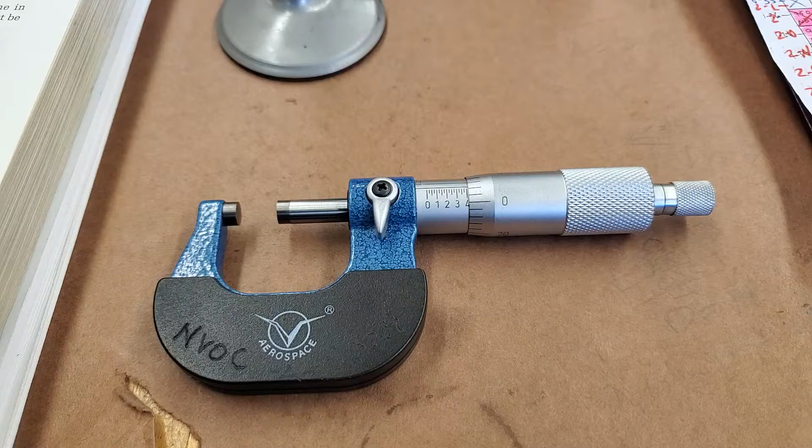Hey guys, thank you for watching, and today I'm going to show you how to use a micrometer.

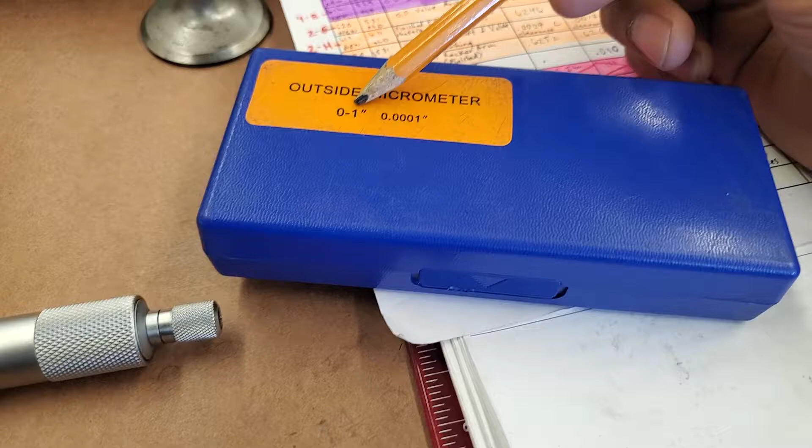And it came in this box, which is an outside micrometer. It measures from 0 to 1 inch, and it's in 0.0001, ten-thousandths. And right here you can see the parts: a frame.

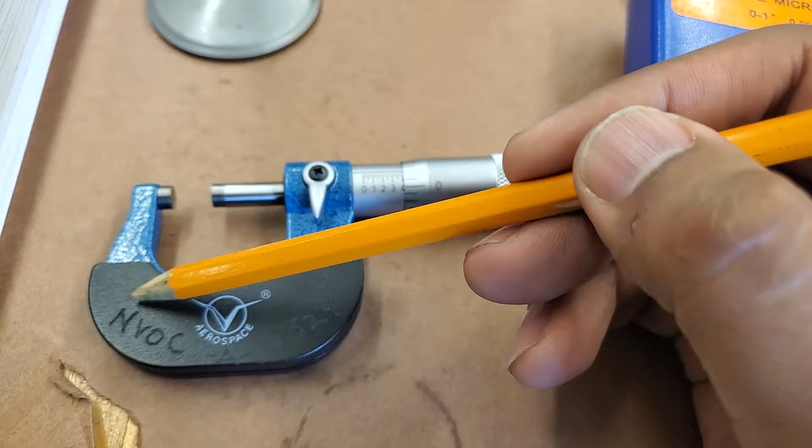This is the frame right here, and this is the anvil, and this right here is a spindle, and this right here is a lock nut to lock the measurement once you have your measurement correct. Then right here's a sleeve, and right here that you turn on is a thimble, and this right here is

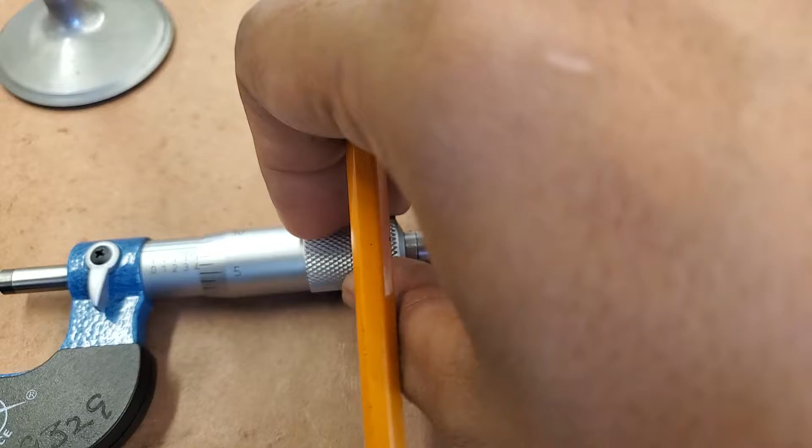the ratchet screw. This is only used when you're really close to the measurement and you start to turn it, and then you start to hear some clicks.

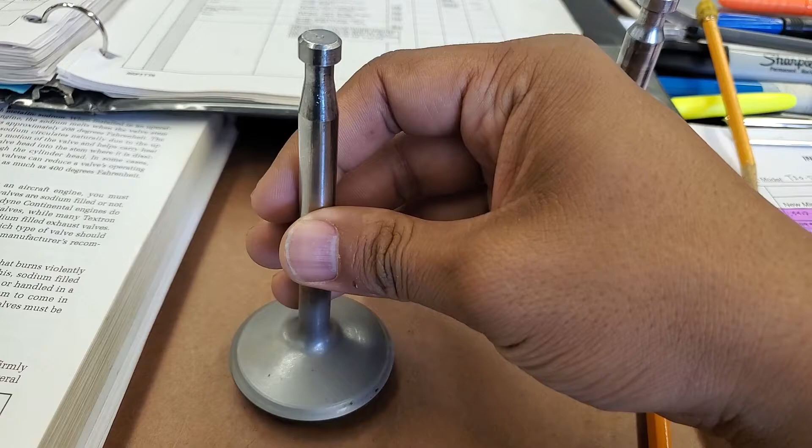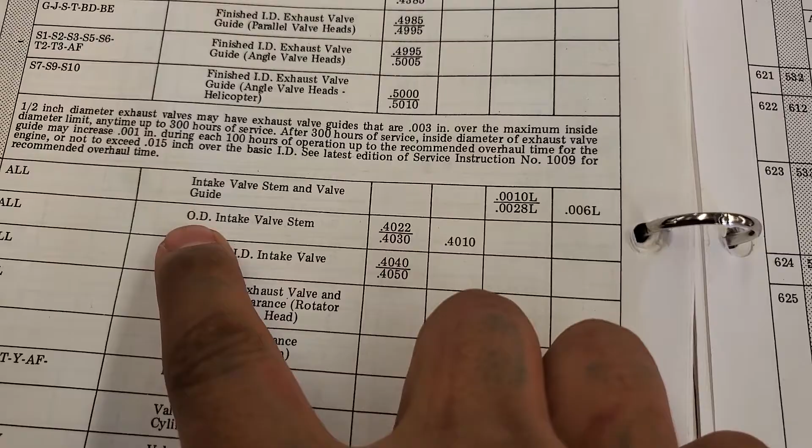So what we're going to be measuring today is the intake valve stem, which is this thickness part, which is outside. I already have my measurements on my table limits, and I'm going to be measuring my OD intake valve stem, which is between my minimum and maximum, which is 0.4022 all the way to 0.4030.

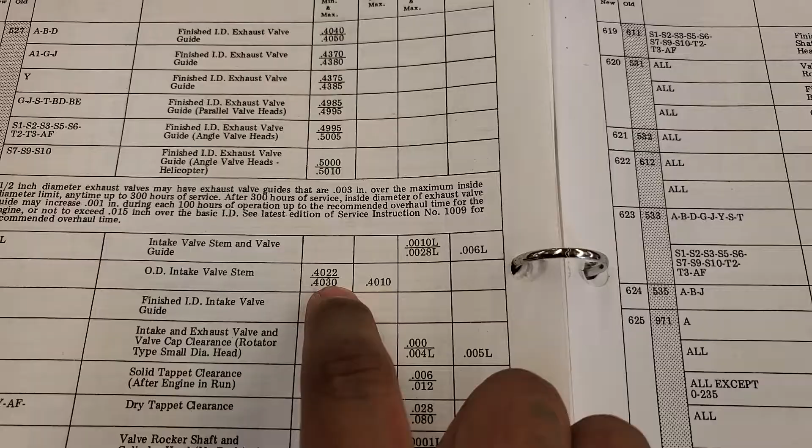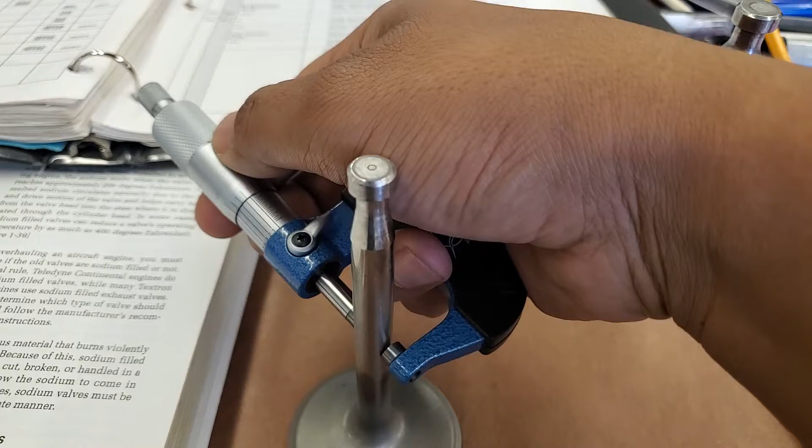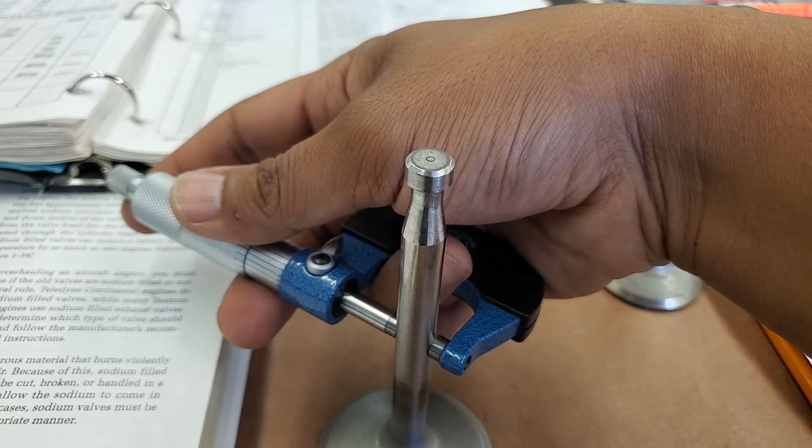So what you want to do is take your micrometer, open it up so you could put this in between, and you make sure it's nice and tight. And once you find it, you click right there, then you lock it, then you remove it.

Now what you want to do is start getting the readings on the measurements. So it looks like mine is close to passing a 4 line, which I put right here, 0.4. And then after that, be aware that these are increments of 25. So mine says from 0 to 25, then 50, then 75, then 1.

So I see right here that mine says a 4, but it didn't pass another line, so it's not a 25. So I put a 0 right here. So mine is a 0.

Then what I do is I look right here in my thimble, there's another measurement, and then I end up writing that number down, which starts from 0: 0, 1, 2, and as I can see, it didn't pass this line. Since it didn't pass that line, I count, so it's 0, 1, 2. I write down a 2 right here.

Now I look at my vernier scale, which is right here on the side, where it has this 1, 2, 3 sides, and wherever this line lands on, the closest is going to be my number. So all I got to do is just see, and it looks like it landed on, I think, a 7. So it's a 7 right there, so I write it down right here, a 7.

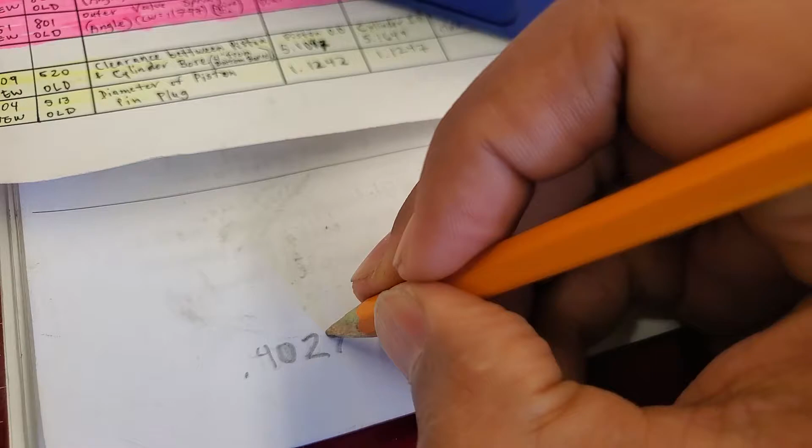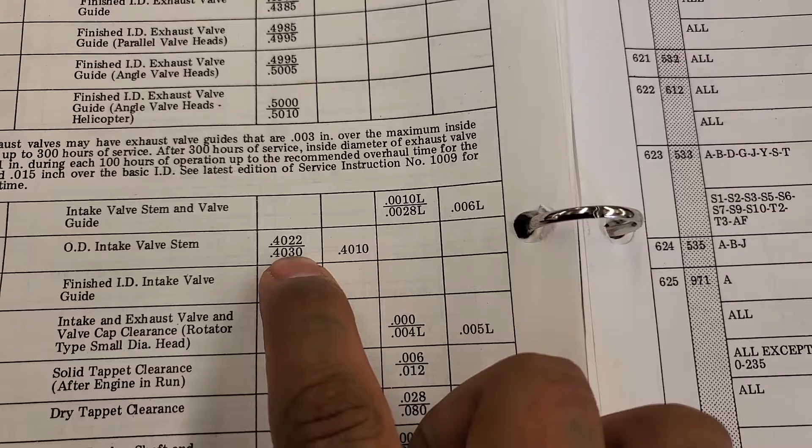So mine says 0.4027. So if this number is between this number, I guess it's an acceptable part, which is 4022 all the way to 4030. So it's accepted. So I write it down right here on my inspection report,

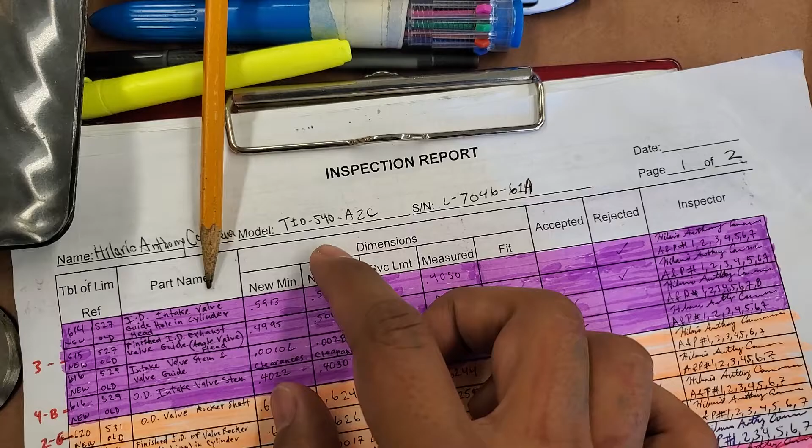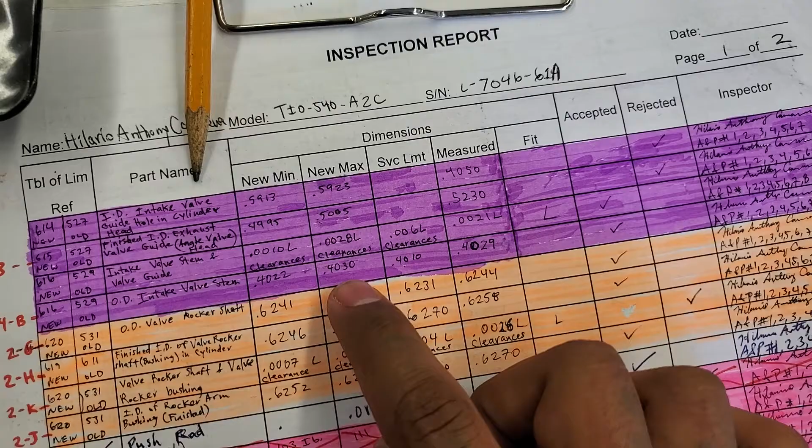and I already did it, and mine says OD intake valve stem, which is 0.4022 min, 0.4030 max. My measurement, I ended up getting 0.4029. I accepted it as a good part. I wrote it down, and that's how you guys use a micrometer.